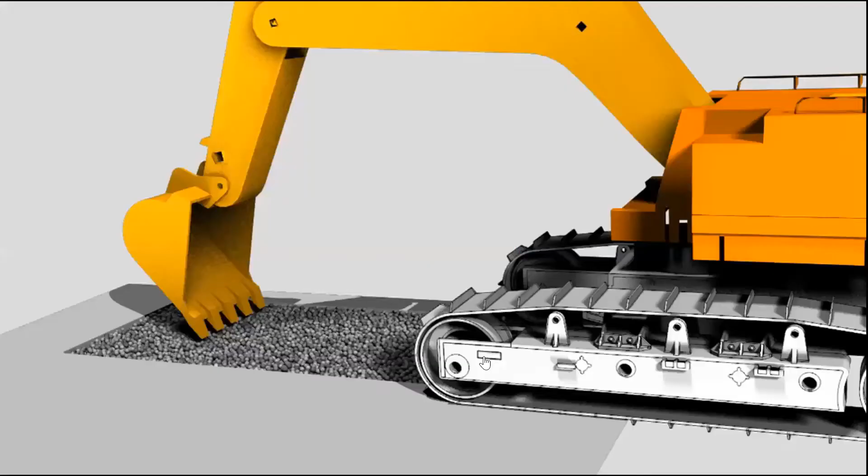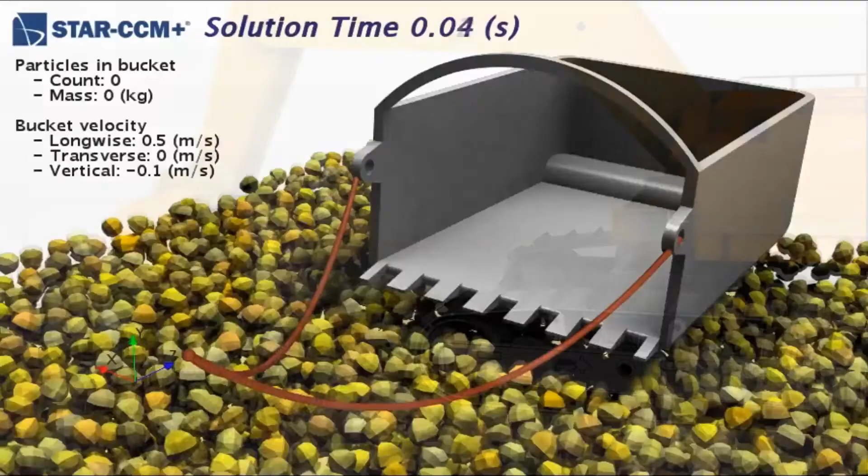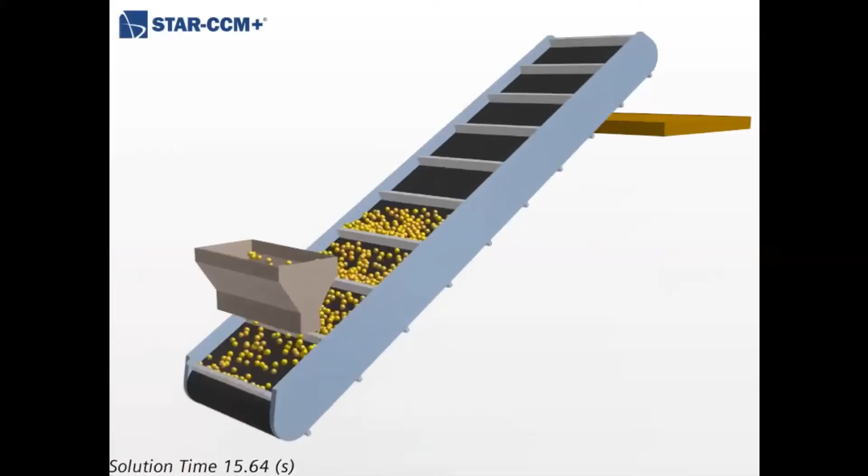At the basic level, a DEM solver could model this on its own without any fluids, just modeling the dynamics of the particles, moving things around. With STAR, you can actually change the CAD and the shape of particles. This is highlighting some obscure shapes being moved around. And then coupling it with 3D moving geometry and solids to actually do this kind of conveying is also part of STAR-CCM Plus.

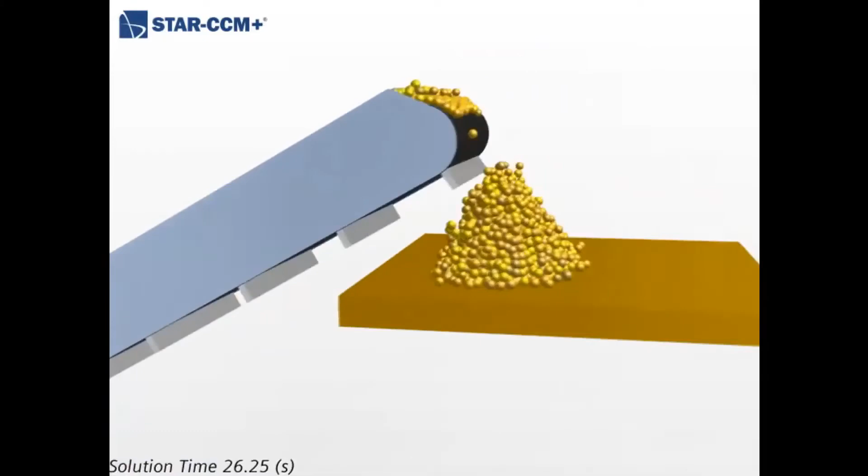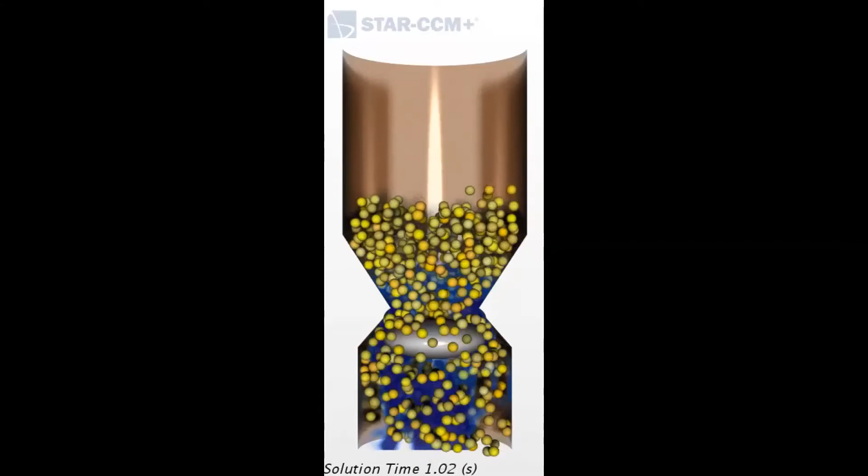Now all of those you've just seen could really have been modeled without any fluids. But many problems really need both the DEM part to model the particles coupled with the fluid solver, such as in the oil industry, moving oil and water with a slurry of sand inside, or particles through a valve like this example, where the particles become an integral part of the flow, and both impact each other.

That hopefully will have got people thinking more questions than answers so far. But really, suffice to say, STAR-CCM Plus has DEM built in - it's part of a standard license. So anyone on the call, and I know there's a few who already have STAR-CCM Plus, are able to use this now, today if they wanted to. There's no extra licensing, it's built in and ready to go.

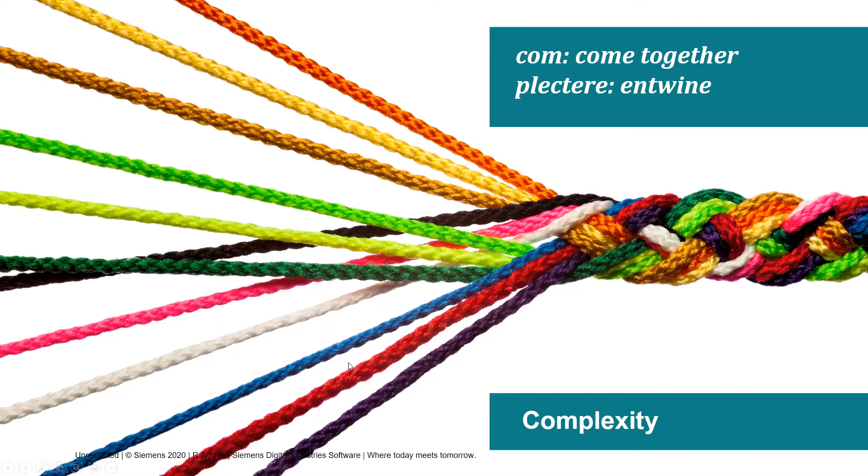When we try to solve such industrial problems, we have a few choices. One is to do nothing, completely ignore them, and deal with the consequences. Most often what we do is simplify them - we say I'm going to look at only one part of the physics, then look at another part of the physics, and try to make sense of how these two could be interacting with each other.

When we look at engineering problems and the solutions we try to create, it was with the idea that if we can resolve this complexity, we can understand it better. And if we understand it better, we can solve those problems with their complexities, and therefore achieve higher value, impacting business as well. That is what you already explained, Adam, to some degree - how can we improve and understand such complex operations by coupling various parts of the physics?

I do want to mention that when we speak about coupling, there are quite a few different notions. You can have one way of solving one part of the physics, another way of solving the other part, and then look at the results and make sense of it - that would be the lowest level of things one can achieve. The second would be that you take data from the first and send it to the next, then take data back from the second and send it to the first - that's what you can call co-simulation, where there are two different physics running independently.

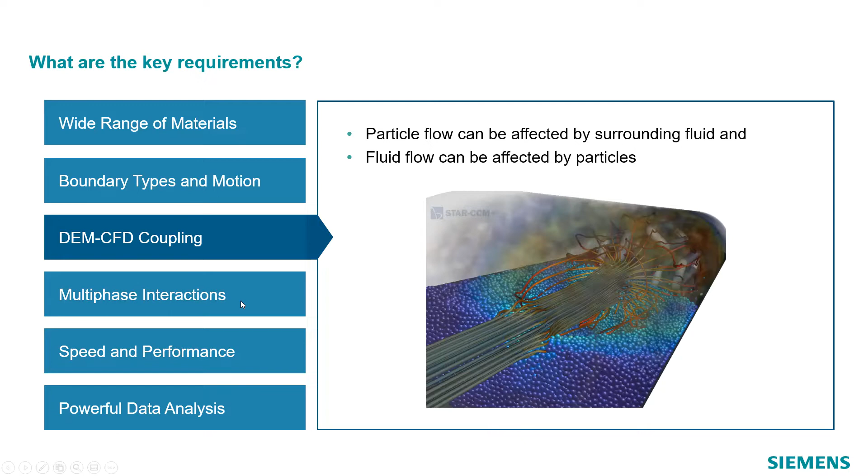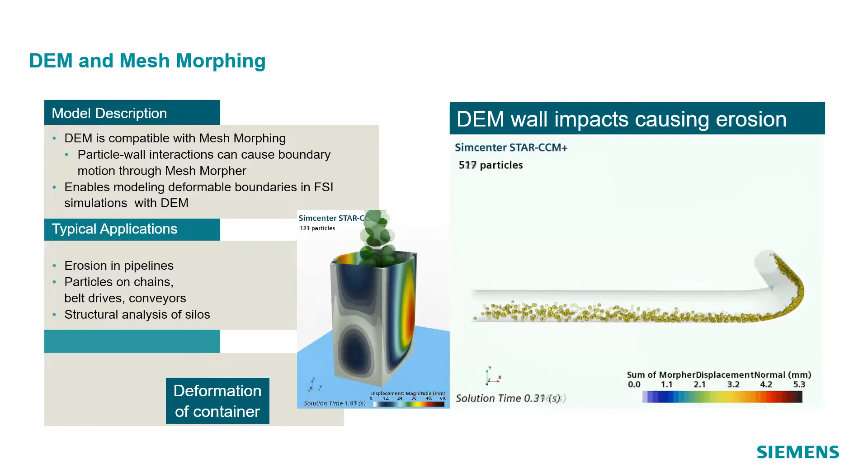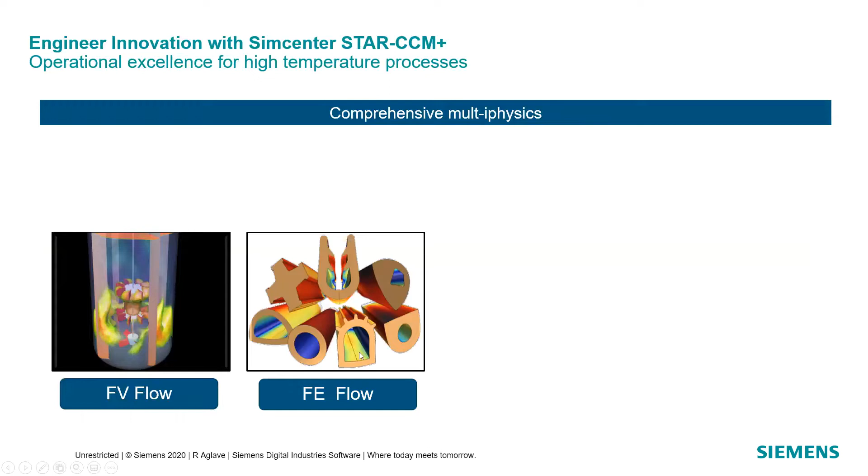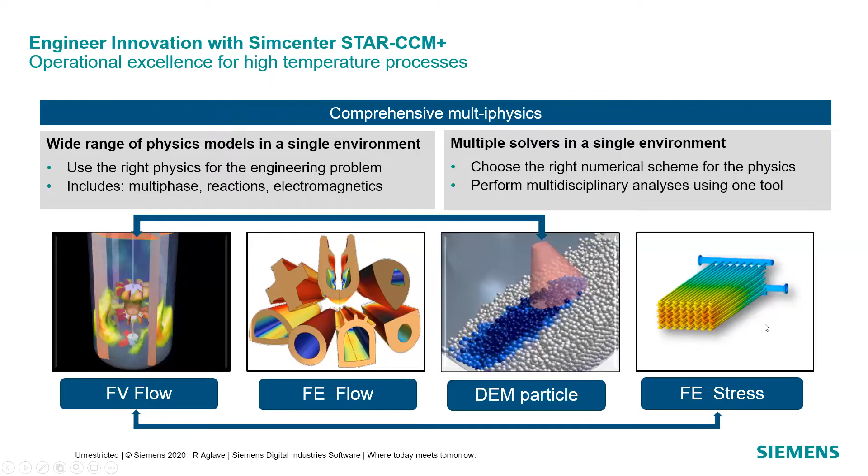So the STAR-CCM Plus platform, if you know it or if you don't know it, is worth mentioning. It has a CFD solver, which is a finite volume-based solver. There is also a finite element flow solver that is primarily for viscous and viscoelastic fluids. There is the discrete element particle flow solver, which is coupled with the finite volume flow solver. And then there is a finite element thermal and stress solver, which is also coupled with the flow solver, especially for problems that are tightly coupled in that sense. So it's multiple solvers in a single environment.

And what it allows us to do is really to investigate effects that are otherwise quite difficult to figure out. So if you have sand particles that are melting due to heat applied to them, and then eventually being converted into a flowing glass at the bottom here. This is just a square box example establishing the feasibility of being able to do that.

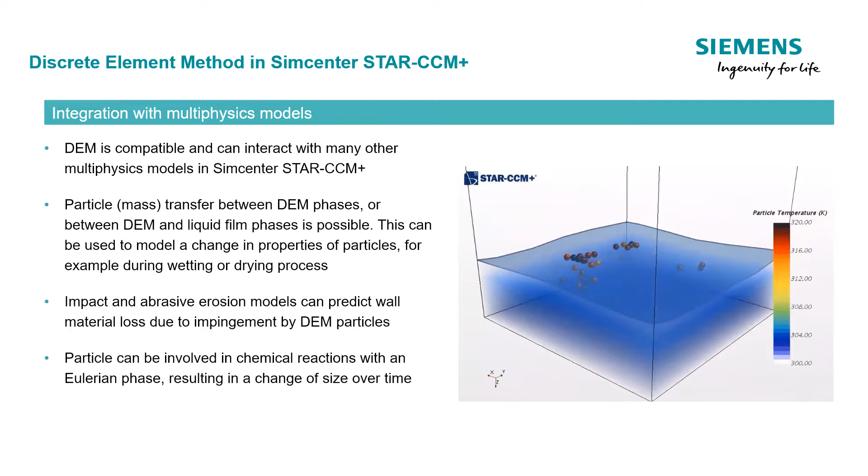So having looked at from a generic point of view what these capabilities capture in terms of range of physics, we can look at some examples of this. But the key thing is we have to understand we can define fluids using either Newton's law or some sort of non-Newtonian constitutive equation. That means a small droplet of fluid will have similar behavior that a large body of fluid will have from a rheological perspective. And that is not true when it comes to particles.

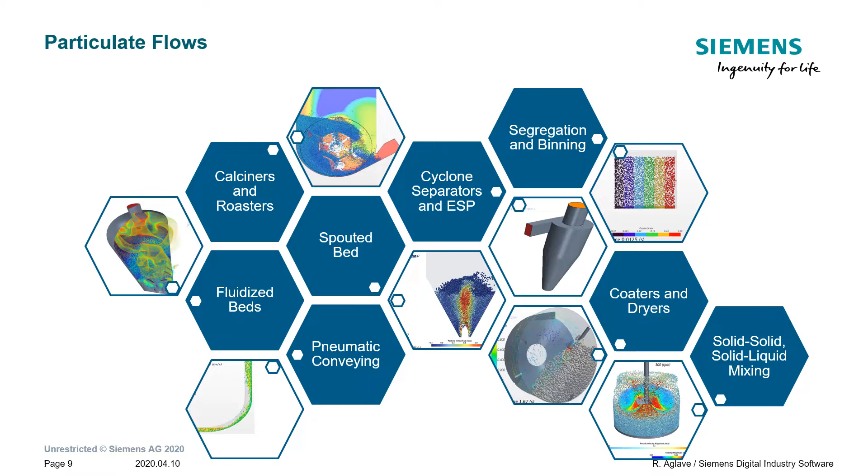So if we want to investigate many of these different industrial applications, which includes pneumatic conveying, fluidization, calciners, segregation, coating, drying, and so forth, we need to understand how does a single particle behave, but at the same time, how do a bulk of particles behave?

And to achieve that, one needs to look at how can I characterize my material? So most of these simulations will need to start with a material characterization exercise. This is something that is unique, because when you do CFD simulations, you have the viscosity or a viscosity-temperature relationship, perhaps from literature, and then you're ready to go. However, this is not true for particle fluids.

There are many different physical events that are involved in defining how the bulk particles will behave. That means that if you have the same material, let's say stone, with particles of a certain size, say 1 millimeter, versus stone particles of a different shape and a different size, their bulk behavior could be different compared to the small particles. So we can do this exercise of modeling the real world behavior of the granular systems by doing a calibration exercise to arrive at a model that gives me all these required quantities in the model.

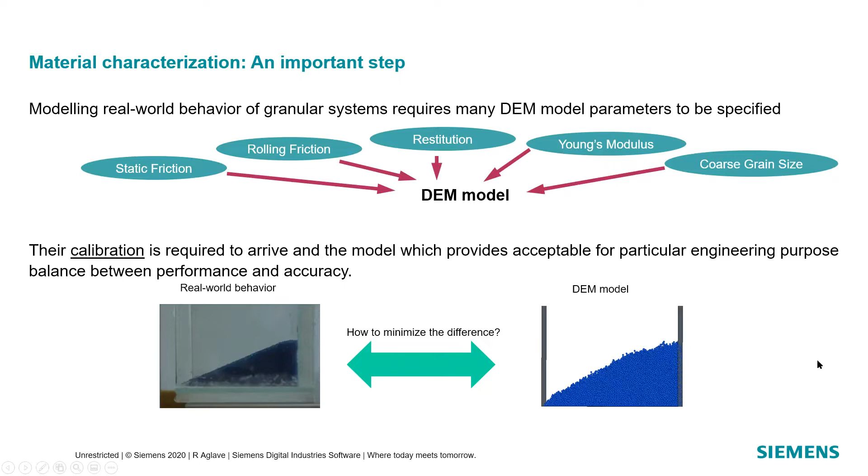And once I have done that, then I'm ready to go along with performing the rest of the simulation. So it generally can start with some sort of a characterization experiment, which includes effects like density, particle size, which then gives me the friction parameters, the Young's modulus, as well as any other rheological behavior. We did a lot of this investigation as part of a master's thesis, which was published a couple of years back from Purdue University.

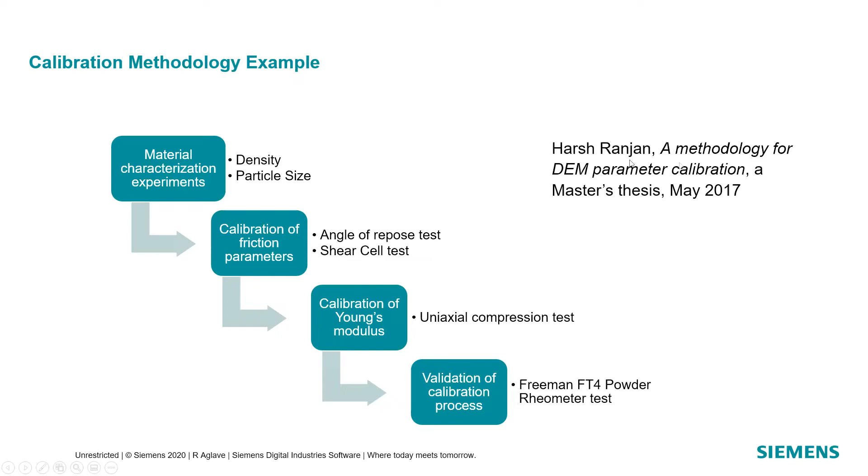If you need this reference, feel free to ping me and I can send you this.

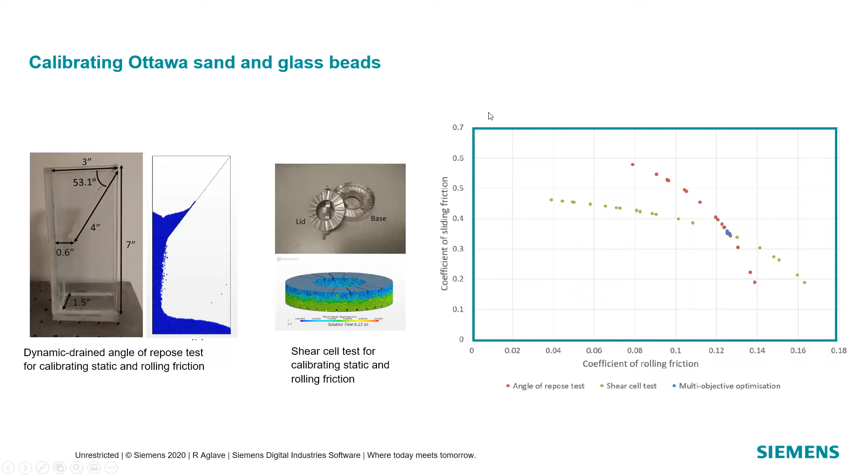This is giving you that example that using a shear cell test, you can look at, for example, the coefficient of sliding friction versus rolling friction. And there are several different tests that were involved. So angle of repose test, a shear cell test, and a multi-objective optimization, which means varying these coefficients until we get the right set of combinations that is reflecting what is happening in reality. So for example, what is the angle of repose or what sort of shear that I would get from this test. So that is kind of the basic step that is required in order to characterize the material.

Here you can see what sort of equipment were used in carrying those tests out. And once we have this information, then we can start looking at some real scale problems.

So this is coming from a steel company where the hopper discharge rate was a problem that needed to be resolved. The key question was how to determine flow characteristics and the regime of particle flows in this bin hopper assembly with a certain particle size distribution. You can look at these images showing you that distribution.

So there is a cylindrical bucket that is unloading, and the angle of repose tests were used to do this calibration. And we then automated the whole process of movement of this bucket, the start of the discharge from the bin onto the lower hopper, and investigated what is the mass that is left on the top hopper, which is an effect of the shape and the friction characteristics of this.

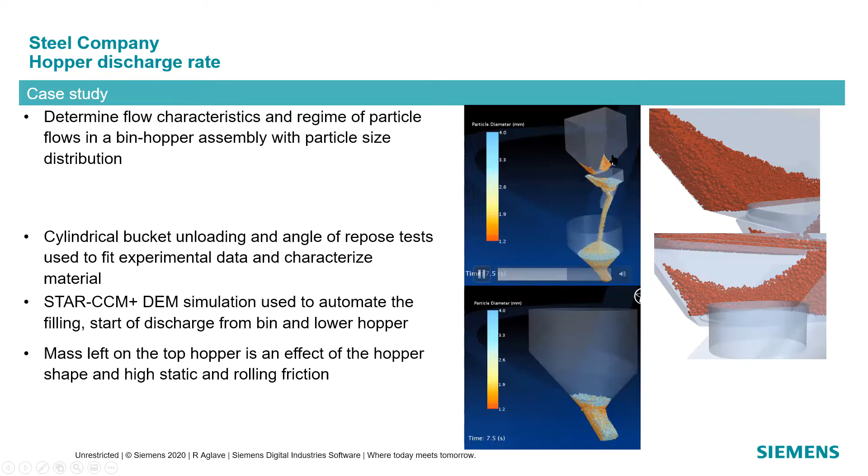So what is to be avoided is that there is some material that is still left at the end of this process. And when we included the particle size distribution at the exit, it showed that there was a segregation effect. That means small particles versus large particles move at different rates, which can then cause a certain amount of particles of certain size being left in the upper part of the hopper.

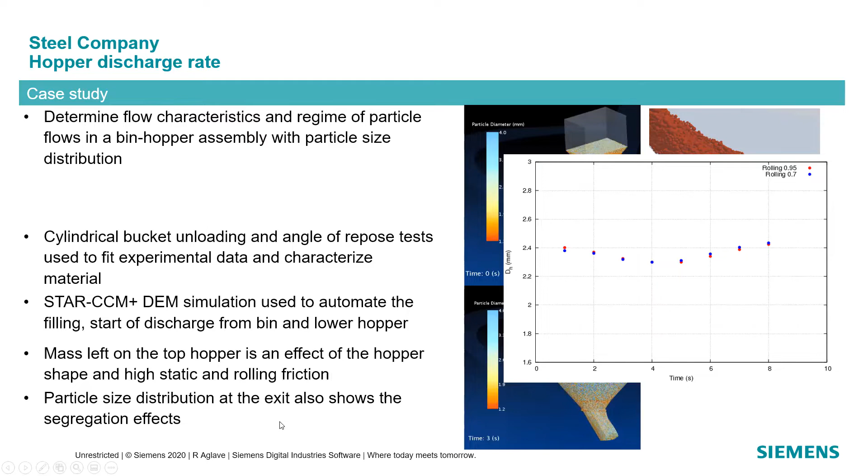A similar type of investigation was done for the formation of a sand mold process, again in the steel and casting industry. You have a chamber filled with sand to create the mold, and this cavity had a special design with air vents to let the air out. These air vents transport the green sand with an airflow during the sand shot.

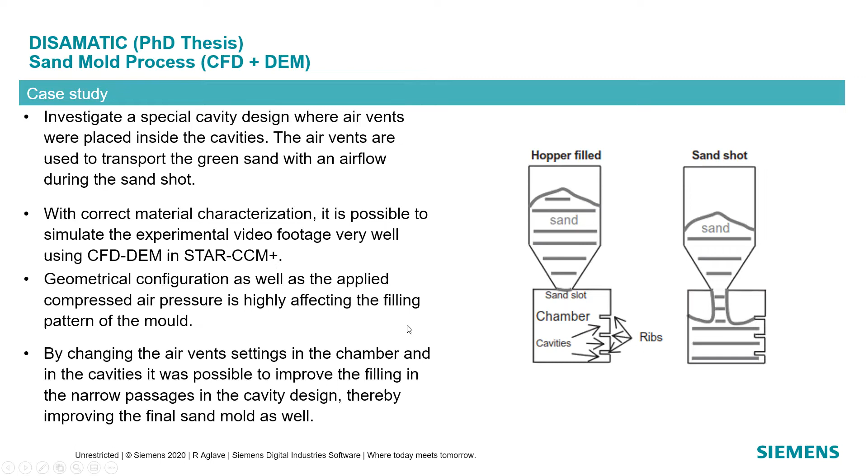With correct material characterization, it's possible to simulate the experimental video footage. There is very little that can be done in terms of measuring the process, but a visual comparison can be done very well. So here we look at the drop of the sand particles at various time shots.

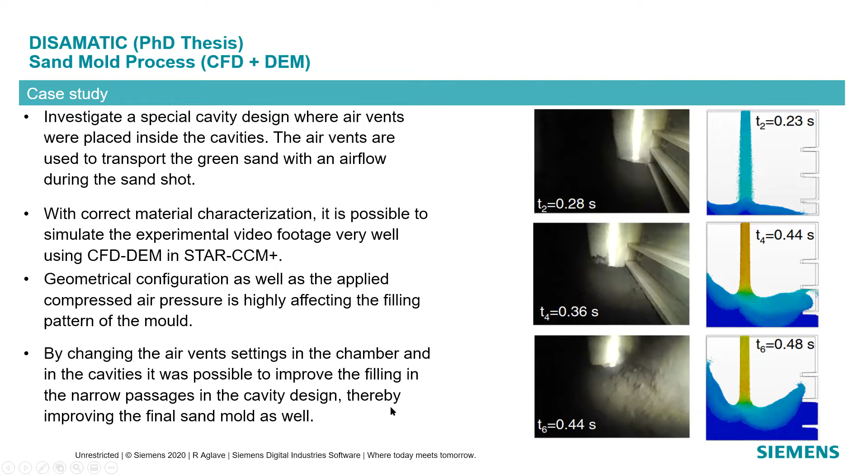It is then compared to the closest footage available from the camera that sat inside the cavity. The geometrical configuration as well as the applied compressed air pressure are the factors that affect the filling pattern of the mold. By changing the air vent settings in the chamber and cavities, it was possible to improve this filling process, also in the narrow passages that were part of the cavity design, therefore improving the final sand mold as well. This design was critical in the final casting product.

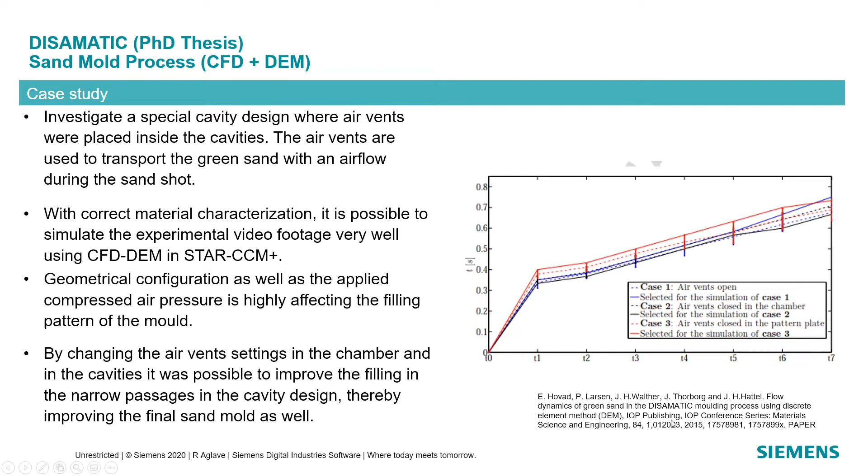That was to be developed. This shows some comparisons of how the air vent open positions align with the results from the simulation. All of this is also available as a reference in a PhD thesis.

Chute design is another area where DEM is commonly used, especially to prevent plugging at impact points. Being able to include body motion allows us to precisely define the timeline and characteristics of how this process begins.

All the elements of particle flow, abrasion, and the motion of the internals can be captured in STAR-CCM+. But the key point here is that one simulation will probably give you insight into the behavior, but not necessarily solve the problem.

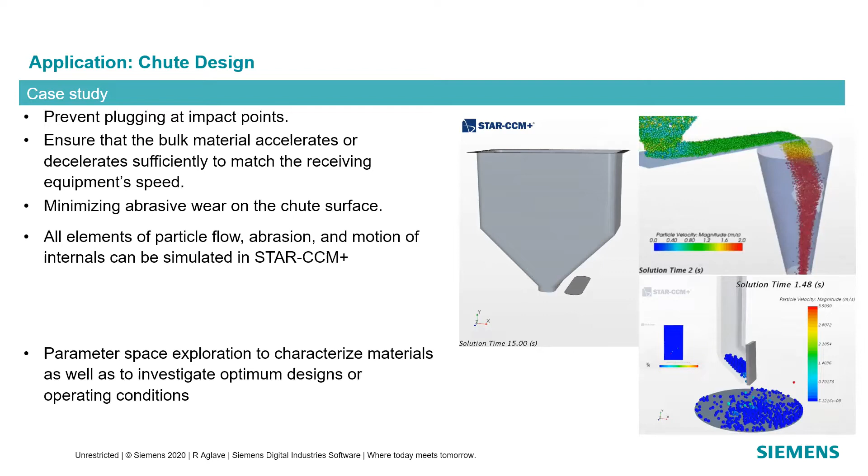So if there is a design goal, one needs to investigate several different designs. The question is, how do I do this? Do I do it one simulation at a time? Or is there a better way of exploring this design space or operating condition space? At that point, we are going to come towards the end of the talk.

Here is another example, coming from the pharmaceutical company Takeda. Again, segregation of particles based on size was a critical issue, and one of these particles is a drug substance. If you have segregation of the drug substance from the excipient, the regulator requires you to bump up the dosage of the drug substance to cover for those losses.

This would mean the pharmaceutical company has to spend a lot more money on this expensive drug substance to cover for that shortfall. So they were trying to look for a design that would minimize this segregation. With the help of simulation, they found which design would be the best one.

On a lab scale, they investigated this by doing experiments with 3D printing. It is estimated that it had an impact of several hundreds of thousands of dollars in terms of scaling up this process from the lab scale to the production scale, as well as reducing the time that would have been required to scale up if everything was done purely experimentally.

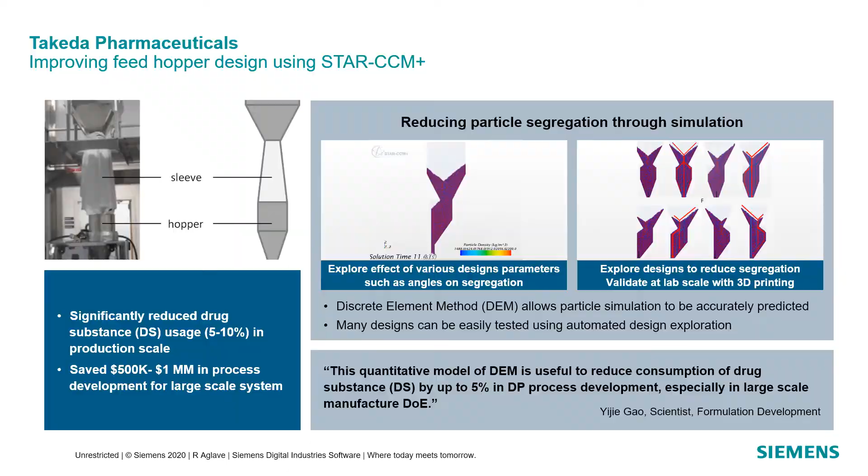Now we come to the part where we know that particles do not exist in vacuum. They are always accompanied by fluid. Sometimes the interaction is very tight and there are two-way interactions. Other times there is one-way interaction. STAR-CCM+ allows you to capture these interactions very easily.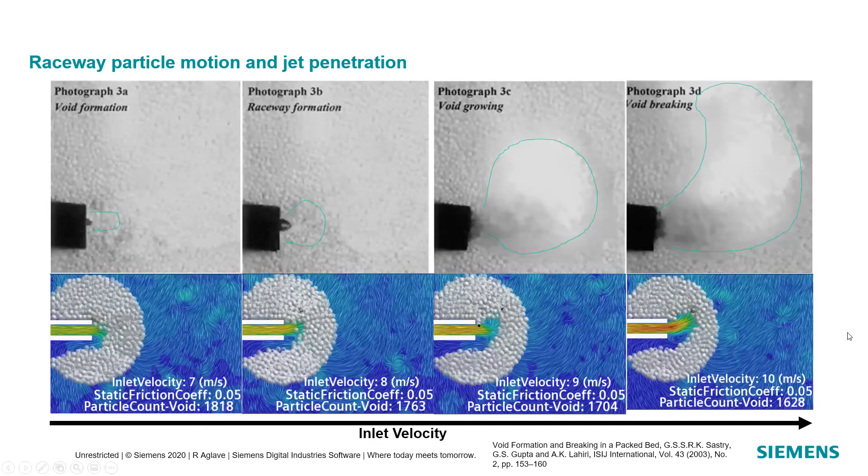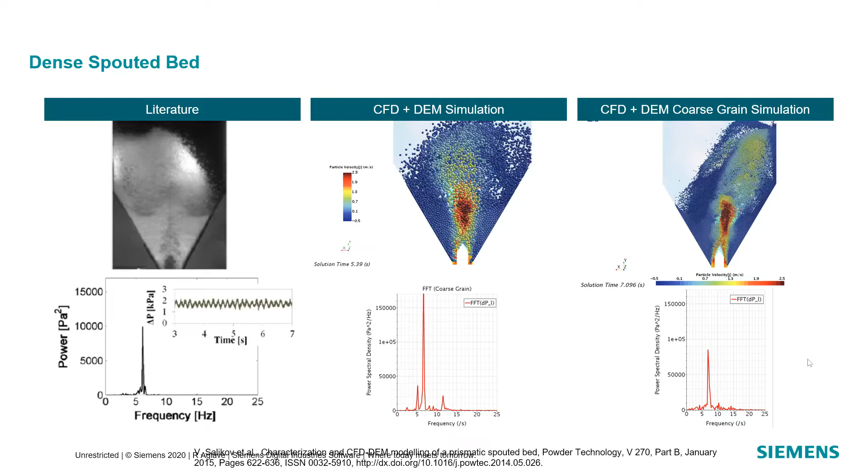We all know DEM simulation can be expensive, so we use a method called coarse graining, which means you create numerical particles, and each numerical particle constitutes several real particles. With the help of coarse graining, we can reduce the computational effort but still reproduce the dynamic response of the bed that we see from experiment. This replicates some work published in literature. We do this type of physics validation quite often to make sure simulation results are in line with reality.

For the longest time, it was a hypothesis that particle-wall collisions were the primary physics causing attrition of these particles, especially the type used in catalytic fluidized beds.

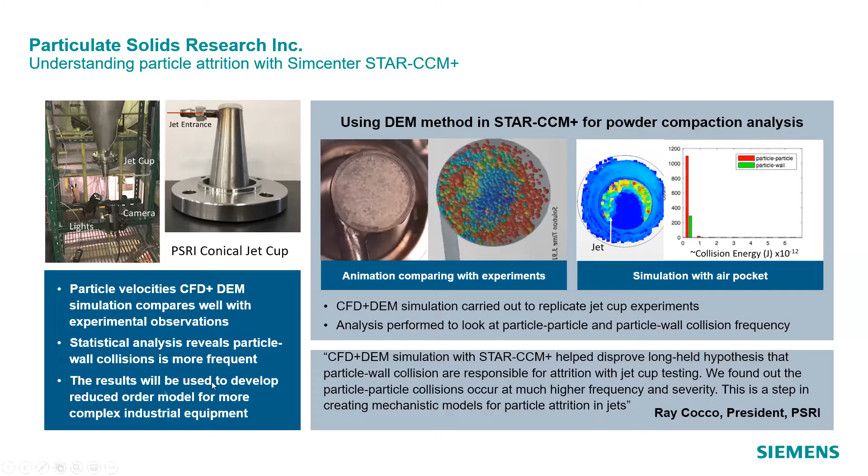But with the help of discrete element modeling and looking at the frequencies of particle-particle and particle-wall collisions, which is otherwise almost impossible to see, we found that particle-particle collisions occur at much higher frequency and also at much higher severity. This was a key step in creating further mechanistic models to understand how particle attrition occurs in jets, commonly seen in the refining industry.

Of course, it's not just refining and steel industry where particle flows are common. We see them also in the pharmaceutical industry, where processes such as granulation and drying are very common.

Here is another example of a fluidized bed granulator, where fluidizing air causes the particles to be fluidized in the upper and lower regions. Then there is a spray creating liquid droplets in the spray zone. These droplets essentially coat the particles, which circulate within the granulator several times before they are coated to the desired degree.

All the rest of the parameters in terms of properties are listed in this table. STAR-CCM+ allows you to look not only at the air flowing and causing fluidization of the particles, but also the spray, which is liquid droplets.

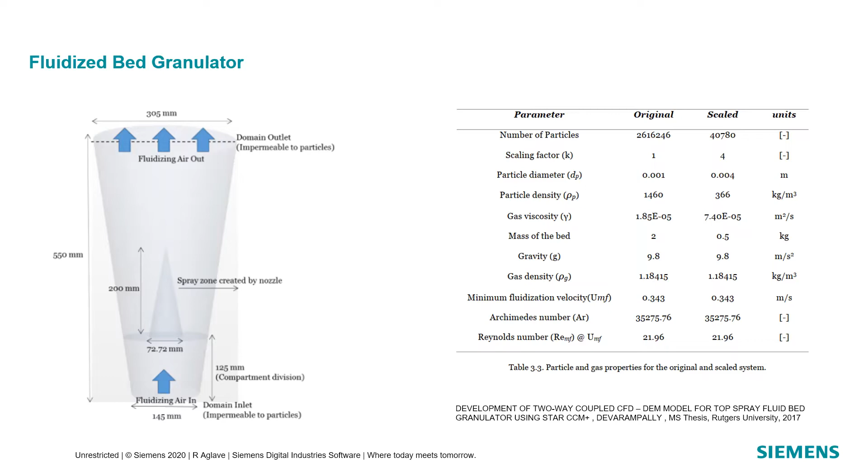We use a counter to calculate how much of the droplets from the spray get coated onto the particles. Since these particles pass through the spray zone several times, we use the counter until we can conclude what coating thickness is achieved.

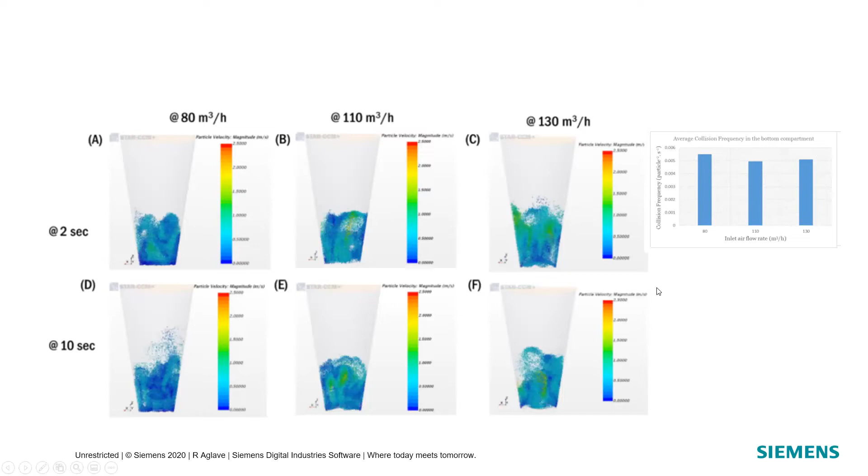In this study, done at the Center for Structured Organic Particles, an investigation was done on how a changing rate of air supplied causes different levels of fluidization, which then affects the collision frequencies. Therefore it affects the passage frequency of the particles, and has an effect on how much coating you get on these particles.

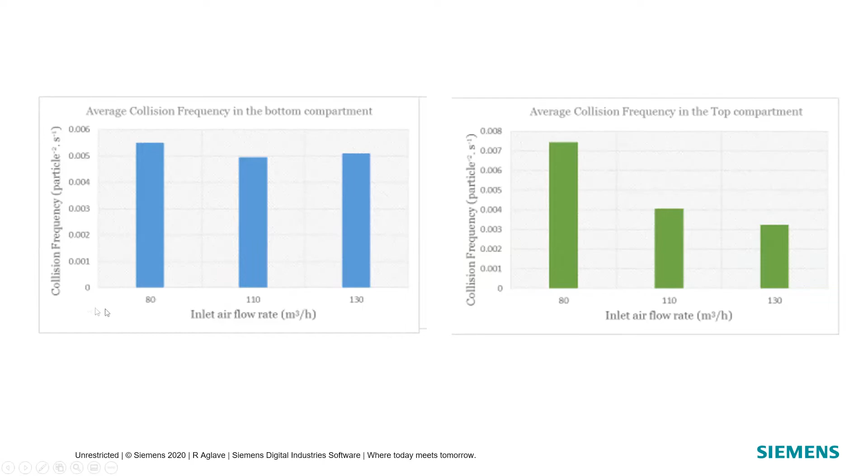Eventually, the average collision frequency in the top compartment versus the bottom compartment could be compared, and we see that collisions in the top compartment are significantly lower compared to the bottom compartment. This calls for a possible adjustment in the design, either of the spray itself or its location, so the overall residence time of the particles can be optimized to achieve the required level of coating.

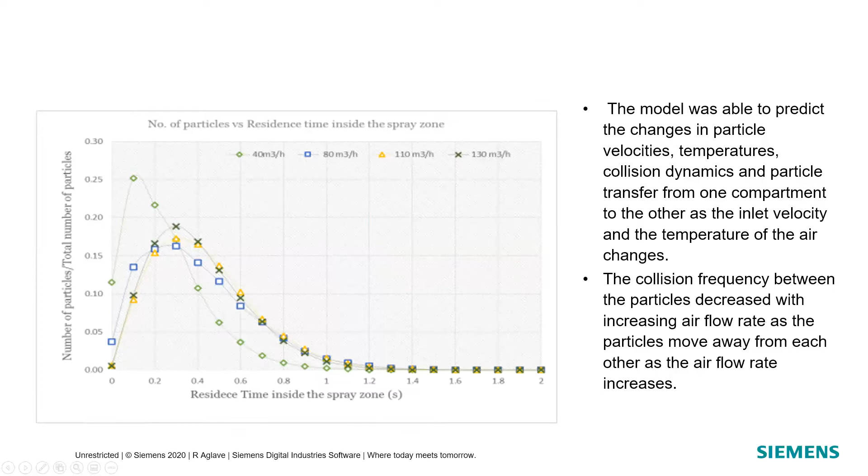The number of particles passing through over the total number of particles essentially tells us the residence time distribution of these particles in the spray zone. This is the critical process parameter that defines the efficiency of the whole granulation process itself.

Here is another example where not only the particle transport and the physical behavior of particles breaking or aggregating was investigated, but it was combined with what is called population balance methodology. That means we look at the population of particles at a certain size and how that changes because of addition of binder droplets that cause particles to agglomerate when they see the binder, or break whenever there is high amount of shear.

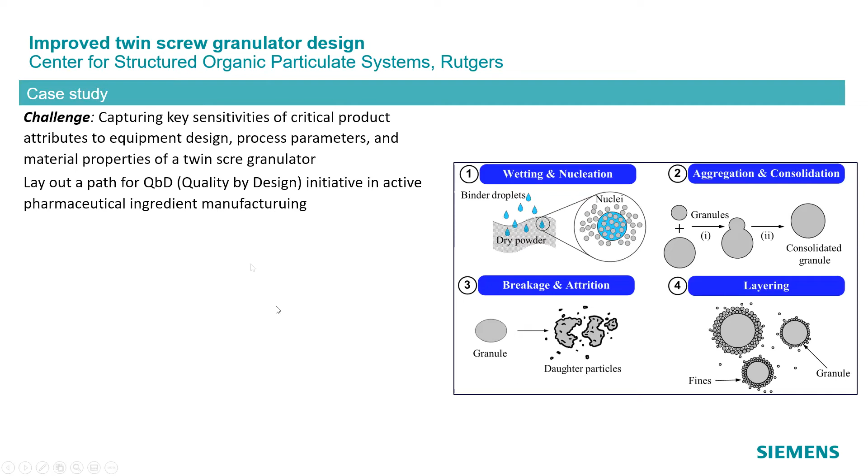So we can capture the key sensitivities of the critical product attributes and link them to the design of the equipment itself. And this is a key step in achieving what is called the quality by design initiative, which is the buzzword in pharmaceutical ingredient manufacturing.

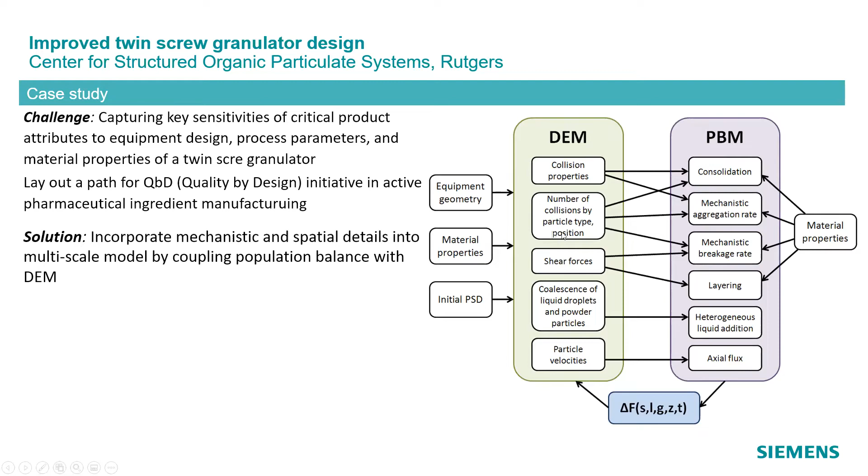So on one hand side we have the characteristics that we get from discrete element modeling. And on the other hand side we have a population balance model that is looking at the agglomeration and breakage rate. And then we interface them and exchange the information between the two sides.

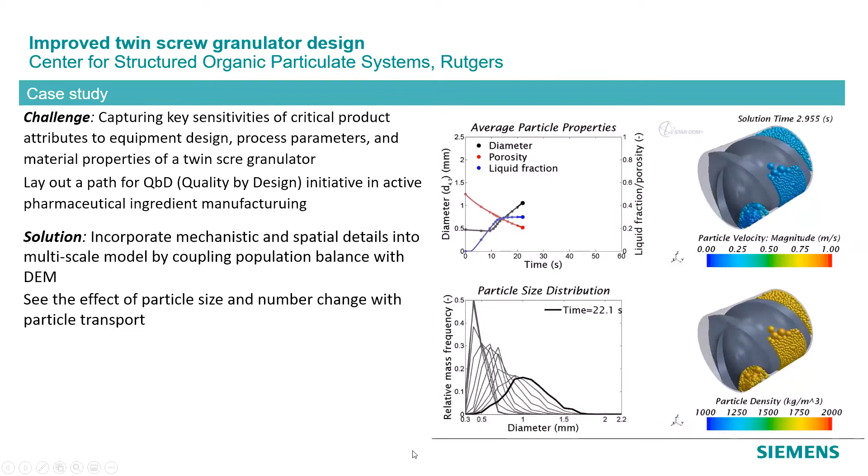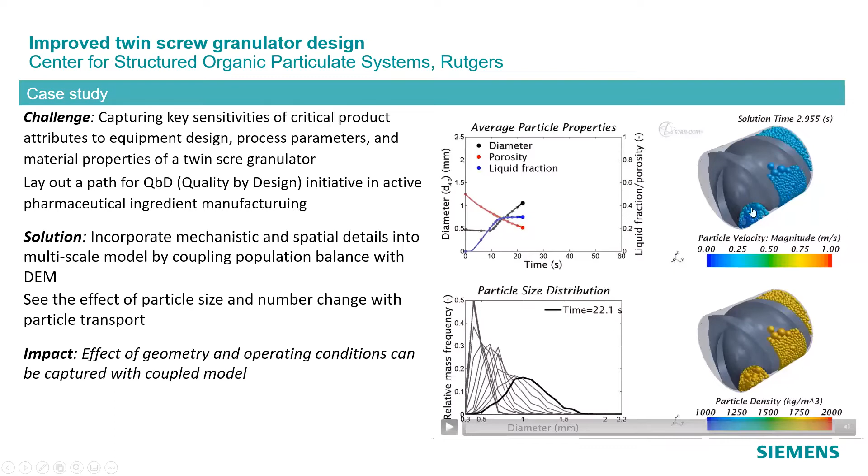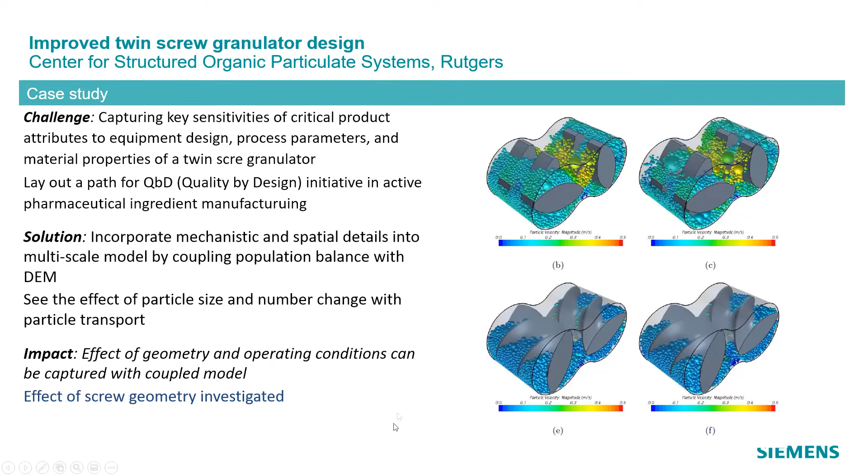If you look very closely, or if the animation is coming through the internet well, you can see in general there are more larger particles as time progresses, showing you the shift of the distribution itself. So the impact is that the effect of these geometries - the shape of the screw, the addition of liquids, the rate of transport, and the number of screw elements - we can investigate them in a virtual environment to see what is the impact on product quality.

So effect of RPM on various particle parameters can be captured, and then in conjunction with the population balance model can be investigated to look at the changes in the particle size distribution itself.

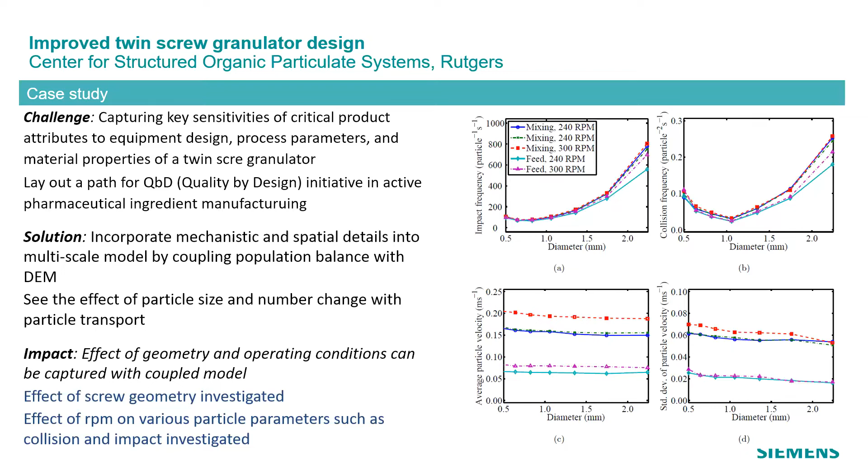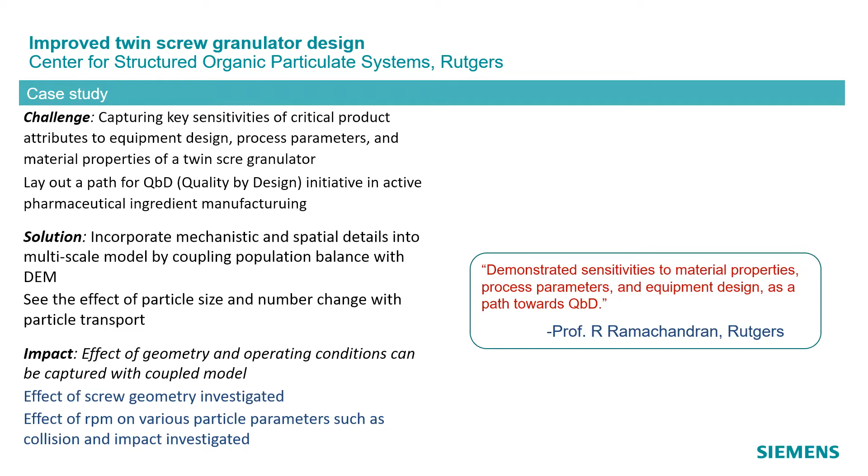Okay, maybe a couple last examples. This is a fluidized bed dryer example, and this is really a key insight into how various physics within STAR-CCM Plus can be utilized with each other. So you have moist particles coming in, and there is dry air introduced, and the goal is that the moisture from the particles will get transferred to the air.

So not only do we need to capture how these particles are fluidized, but we also need to include the evaporation of the water from the particles into the dry air that is flowing through.

So we can define the rate of water evaporation of the particles based on typical mass balance relationships that we see, which includes the vapor pressure of the water that is evaporating inside the particle as well as in the dry air. And then we can connect them in a very simplistic manner, including the field function capabilities in STAR-CCM Plus.

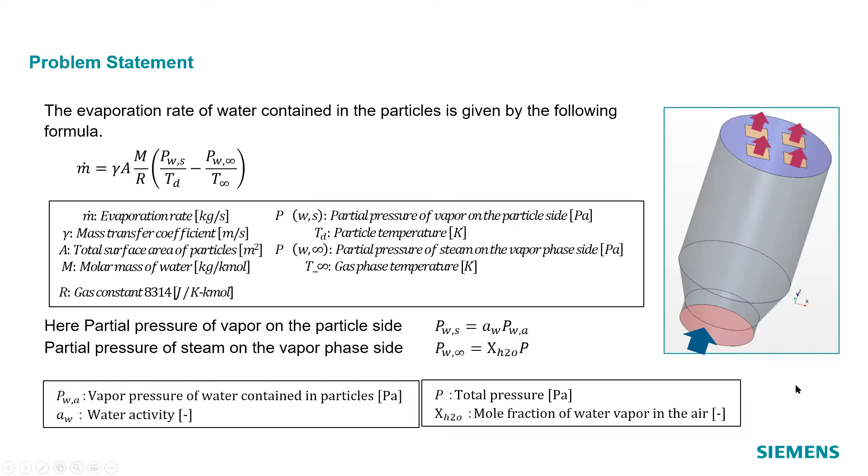And in this we can define what is the activity coefficient of water based on the moisture content. That means it defines basically how much of the water from the particle will be transferred into the air phase.

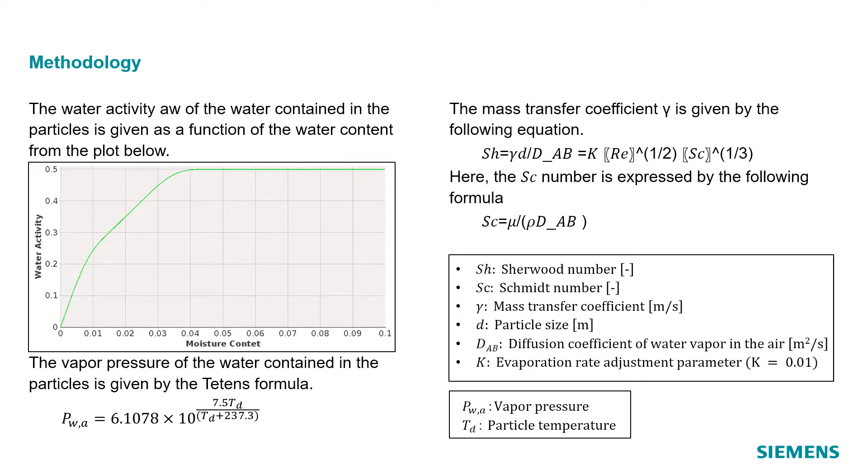And then we define the coefficients that are correlating that transfer coefficient from the solid side, that is the particle side, to the gas side. And then they are connected with the diffusivity as well as the heat transfer that happens from the dry hot air to the cold moist particles, if you will.

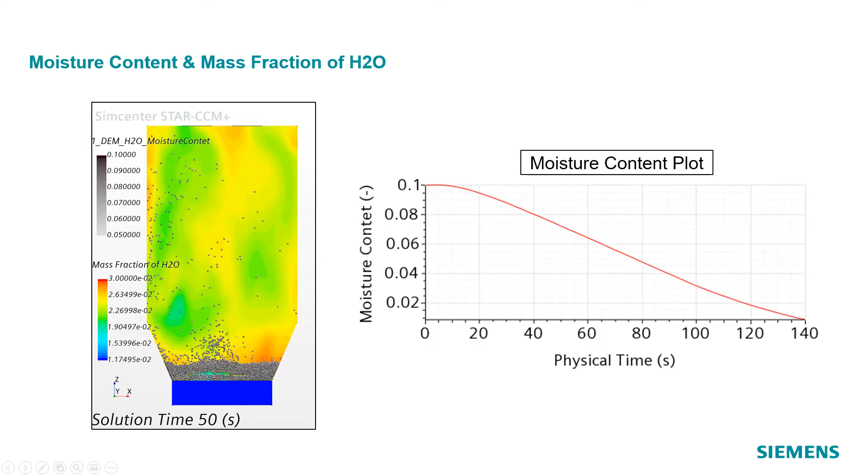Let me end with an example of coating, especially talking about how simulation is used in the context of solving engineering problems. So coating is another very key unit operation in the pharmaceutical industry. You have a spray - I gave you a previous example which was fluidized bed. In this case, this is a rotary coater.

And we have these two coaters, which are showing you an example of a single spray versus two sprays. We can, of course, also investigate what is the effect of the baffle design and so forth.

So if you go from a single spray to a two spray design, I can see that the standard deviation reduces from this green curve here to the red curve, which just tells me that two sprays are more effective in reducing the non-uniformity of the coating thickness in the particles, which is an obvious conclusion.

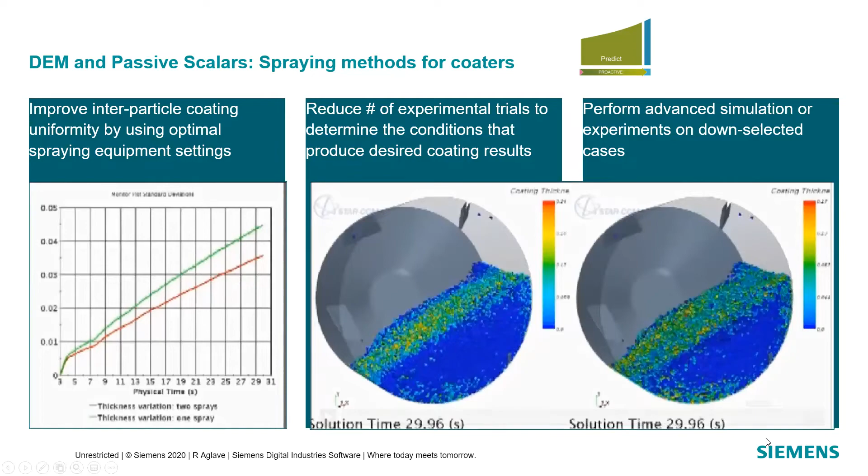But the key question then we have to ask is, how can I utilize this in order to find a design or operating condition that will give me the most optimum design or condition that reduces my deviation of the coating uniformity.

And this is essentially what we tried to do in an example. So of course, here we are utilizing that we can capture the tablet shapes of particles as well, so cut cylinders if you will. Here we use a third phase, which is for the spray that is hitting the particles.

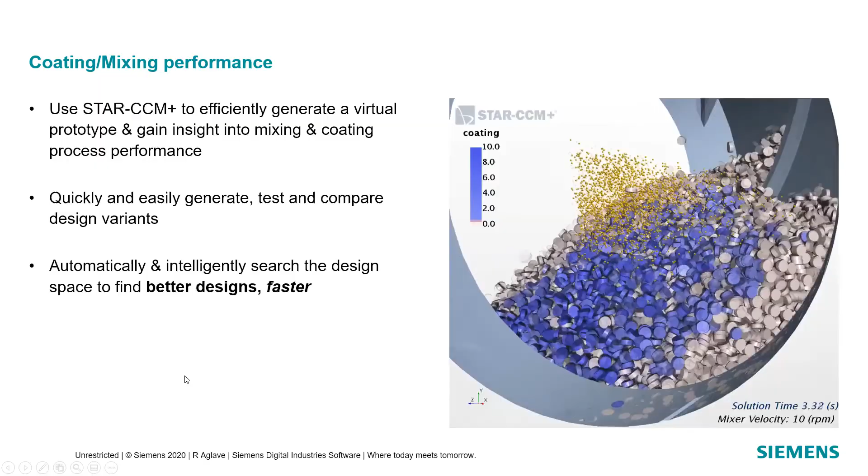And now we want to automatically and intelligently search for the design that gives me the best coating uniformity. So design space exploration is a concept which tries to address multiple challenges in a single study. We want to maximize efficiency, maximize distributions, minimize perhaps energy consumption, avoid excessive wear and abrasion in designs, and optimize overall performance at the whole system level.

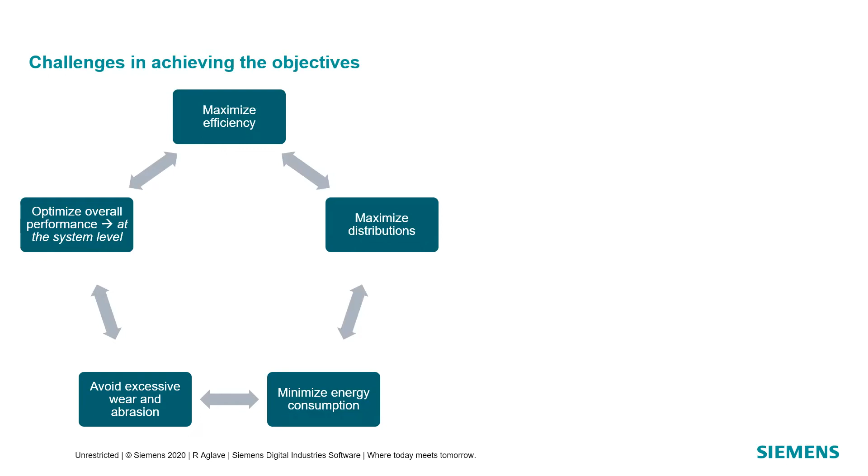And when we start to see many of these words, maximize, minimize, occurring together, we immediately see that this is not a single simulation problem, but it needs multiple simulations that need to be repeated in order to balance the various objectives. There are always counteractive acting parameters, and possible multiple designs and experiments might be necessary in order to find the solution.

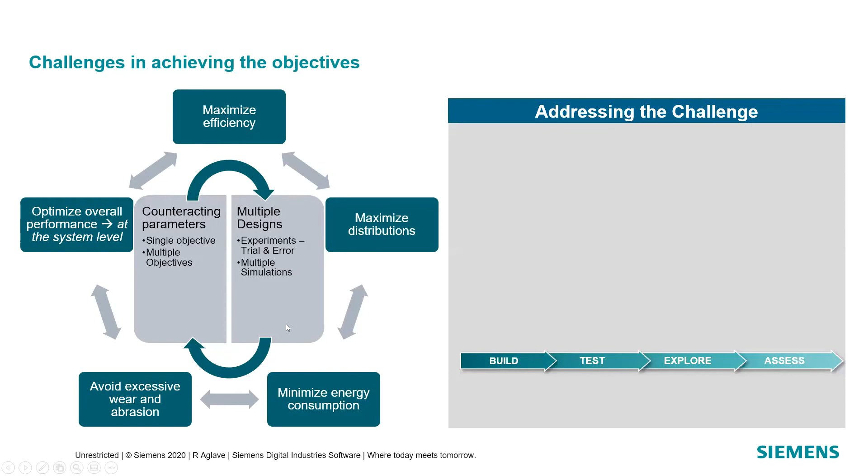So typical simulations say that if you spend a certain amount of time building the model, then very little time is left in order to explore many different designs and to really assess what the engineering simulation is going to be.

Our approach has always been that we can see that the most value comes if we can investigate many different possibilities and from them find what the optimum is. And therefore, we need to assign our engineering time in line with that value.

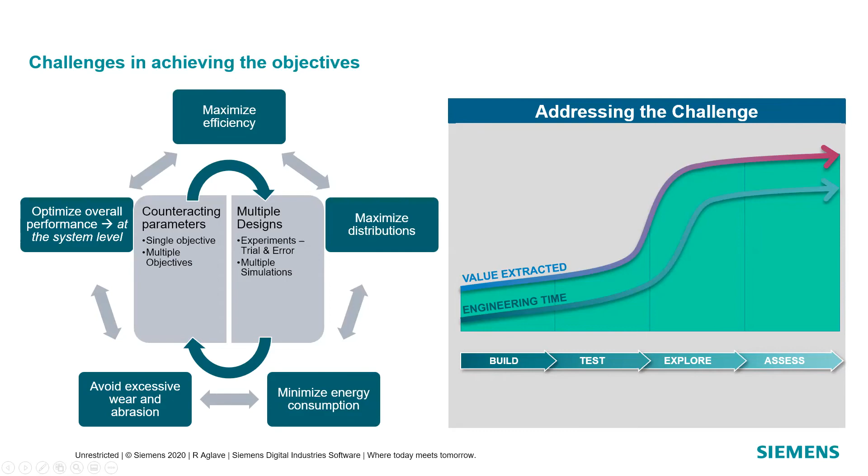So we need to create the model once, thereby reducing the time that is required to build. And then we need to reuse it several times for a given problem statement that has such complexity, in order to have the utilization of time in line with where we see the value, which is explore and assess the results. And that's the way we can discover better designs.

So we want to move from the typical usage cases where we use simulation to validate something or troubleshoot something, maybe also to the extent of predict, but really move higher up the scale where we can automate this process and really explore those designs.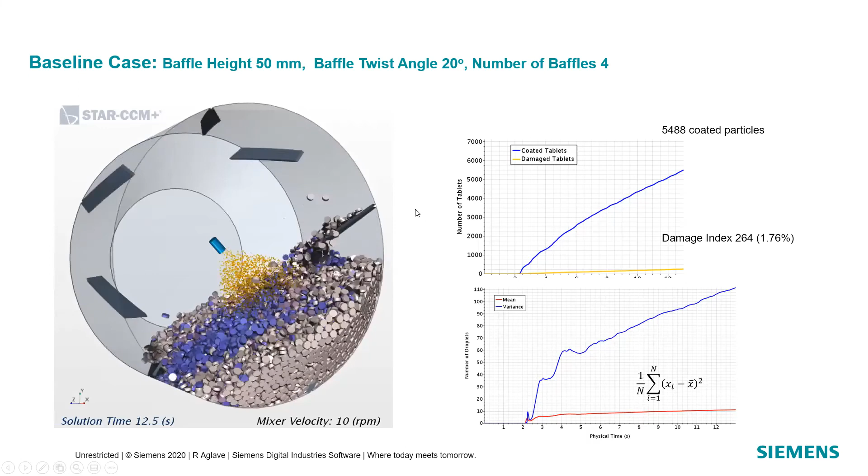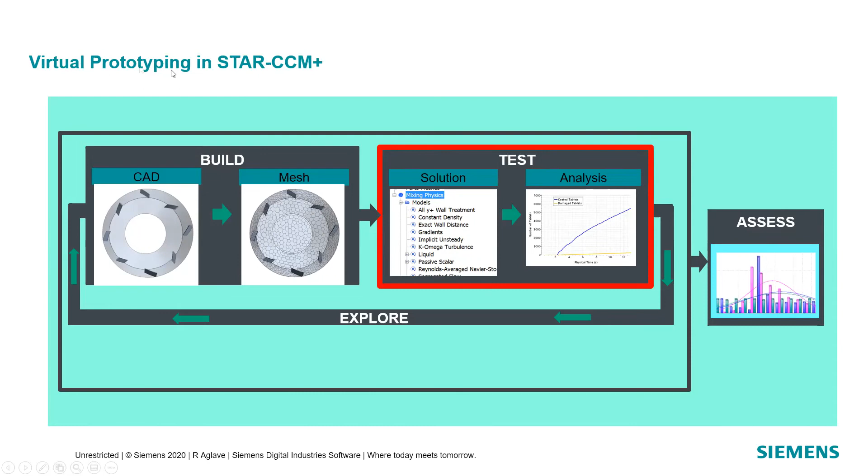And so what we get is a process where we build the model first, which includes the mesh and everything else. And then we test the baseline model, do the analysis. And then we start to repeat this process automatically so that finally we can assess the results from all of these investigations altogether. This is, you can call it, virtual prototyping, if you will.

So in this process, we can specify what are the different variants we want. We can specify the minimum and the maximum limits to those design variables. We can define what are the increments that we need to do them. We can also include any exceptions that we want to include in the study as well.

So in the study, we investigated about 125 different possible configurations. And this is not a brute force approach, mind you. Since we define the goal, that means I want to minimize certain thing and maximize something else, we've tried to find that we get to the goal with minimum possible investigations.

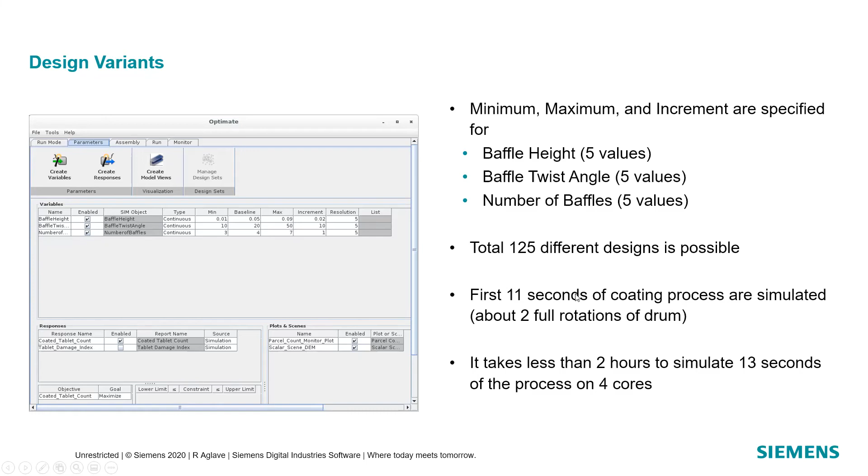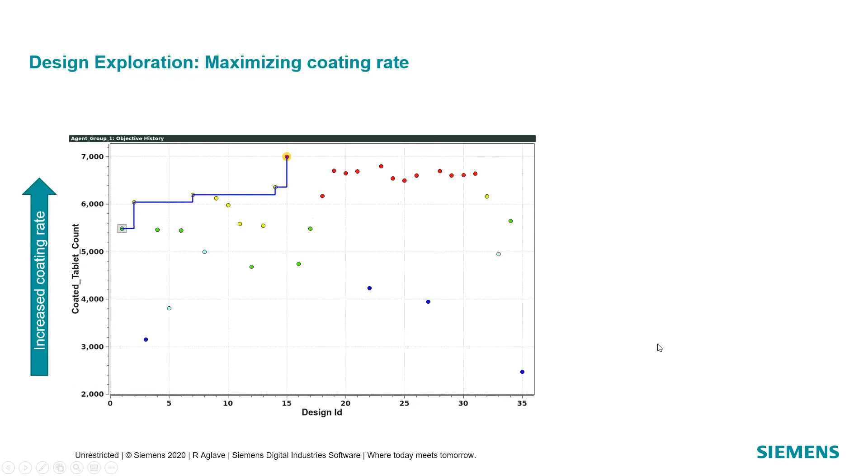So it took about 2 hours to simulate 13 seconds on 4 cores, and then it is repeated about 125 times, spawning on a set of cluster nodes. And what we see is, as these designs are explored, what is the increase in the coating rate in terms of the coated tablet count that we get in order to maximize the coating rate. And finally, we arrive at a final design.

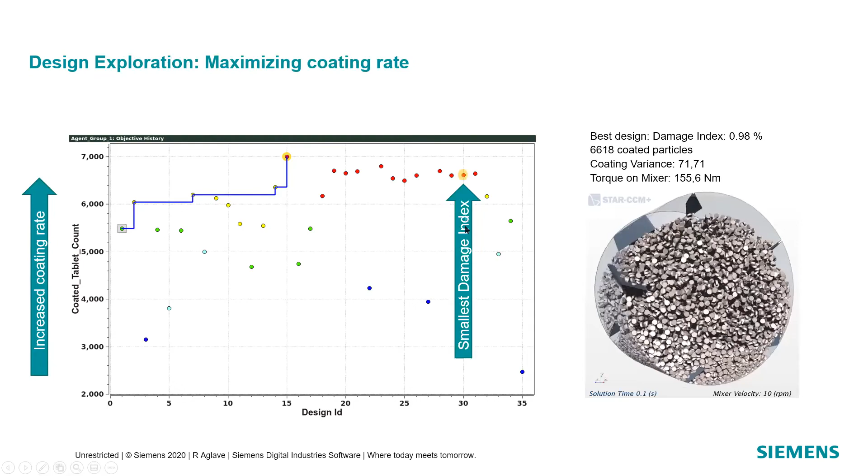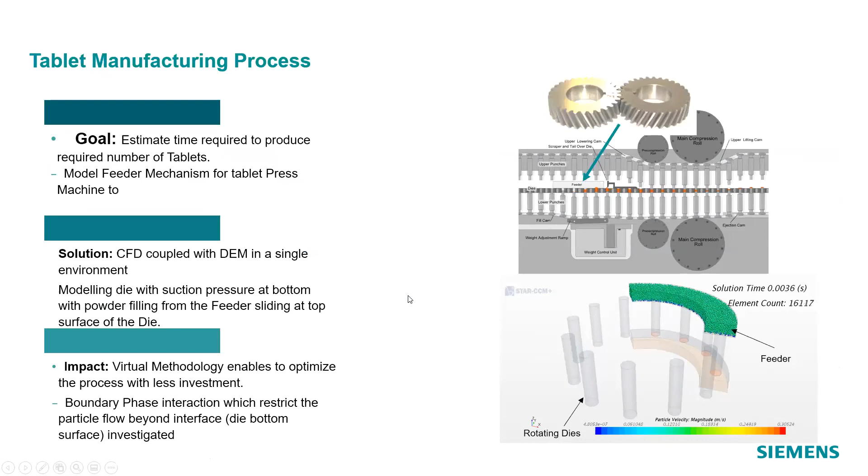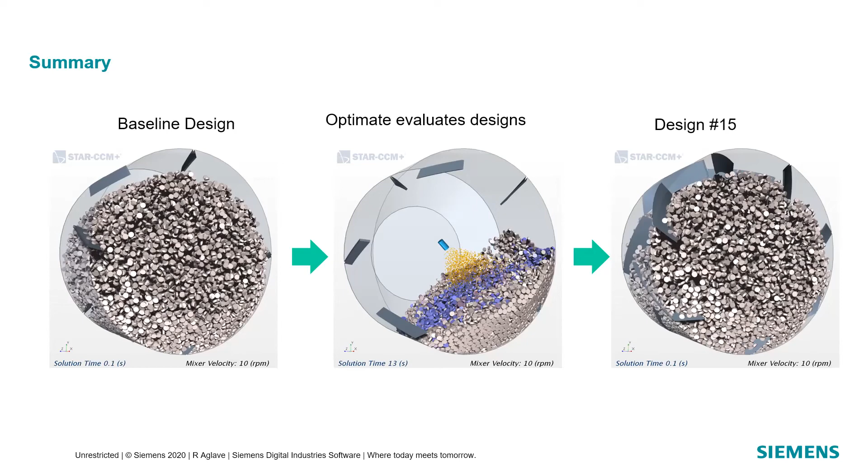We reduce the damage index by several tens of percent and increase the coating uniformity by about 30% or so. So that is kind of a parting message I want to leave, that exploring the entire operating space is a key component in order to investigate and arrive at an optimum operating condition or design of a given equipment.

And we use intelligent search algorithms, but all of that is only possible if we have the right type of physics, which is coupling not only the particle flows, but also the fluid flow and the associated physics together. So I will stop there, Adam.